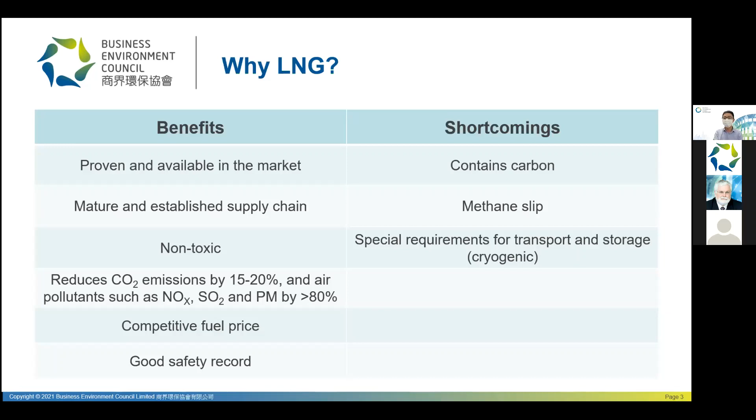While LNG can reduce air pollutant emissions, it is still a fossil fuel, and its reduction potential is dependent on the amount of methane released in the process, which I'll get into in a moment. Another drawback for LNG is its requirement for transport and storage, as the fuel is typically stored at minus 160 degrees Celsius.

So as I mentioned in my last slide, LNG is still a fossil fuel, and its main component is methane, which is a potent greenhouse gas, 86 times stronger than carbon dioxide over a short period of time, and also 34 times stronger over a 100-year time horizon. While this may be less of a problem if methane is completely combusted in the engine, methane may still be released unintendedly along the value chain, and also from incomplete combustion.

The amount of methane slip is largely dependent on the type of engine. Two-stroke engines release less methane than four-stroke engines, and existing engine technologies are already able to reduce well-to-wake emissions, which is the life cycle emissions from fuel production, refining, transportation, and combustion, by 4% to up to 21%, compared with conventional marine fuels.

And ship equipment manufacturers like Wärtsilä have cut methane slip from their dual fuel engines by 85% since 1993. And MAN Energy Solutions are also improving their engine designs, which can reduce methane slip by up to 50% and a potential of a 90% reduction.

For the industry, there are also more than 20 oil and gas companies signed on to the methane guiding principles, which is a voluntary partnership with 5 principles that aims at reducing methane emissions along the natural gas value chain.

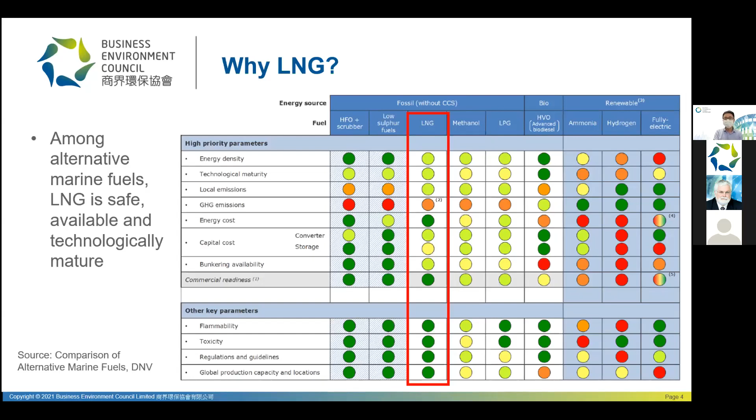This makes it clear that while we acknowledge LNG is not a carbon-free fuel, it still has a major role to play as a transition option until other zero carbon solutions become market ready.

So in the context of Hong Kong, for LNG ships to be refueled, Hong Kong first has to be able to provide LNG as a bunker fuel. Looking at the current natural gas value chain in Hong Kong, we import gas from different locations in the mainland for power generation through submarine pipelines. And we're also constructing an offshore LNG terminal in the south of Lantau that is scheduled for completion in 2022.

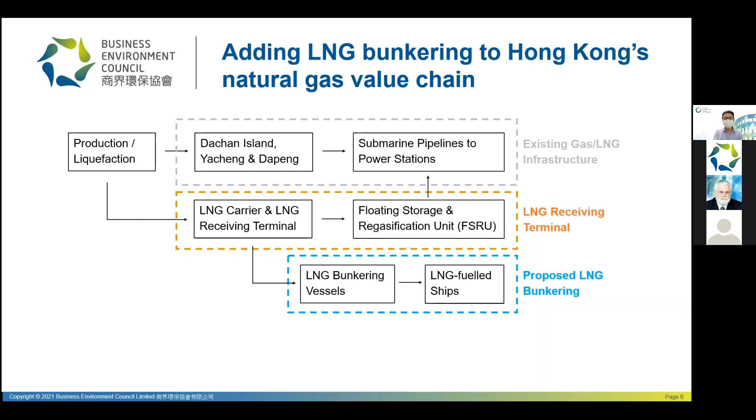The terminal will allow us to directly access the worldwide market for carriers to deliver LNG to a floating storage and regasification unit, FSRU, that will then deliver natural gas in its gaseous form for power generation. But to complete the last mile of LNG bunkering, LNG has to be supplied to LNG-fueled ships, for example, through bunkering vessels. This process is also known as ship-to-ship bunkering.

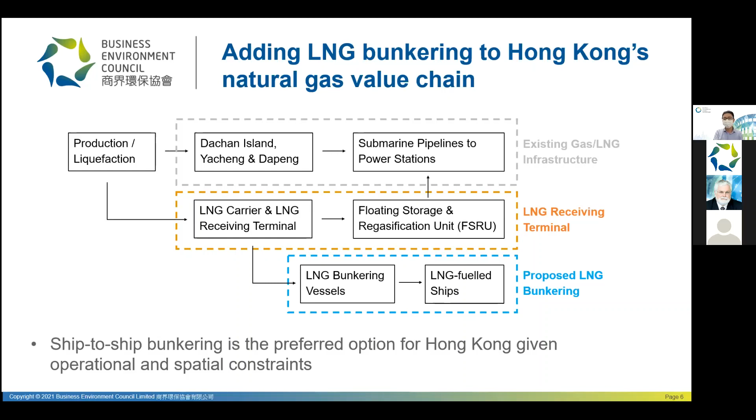While there are also other bunkering options, such as shore-to-ship or truck-to-ship bunkering, they will either require permanent onshore structures or take up land space in port operations, which will not be ideal for Hong Kong. And as with other commercial shipping fuels, LNG operations do present health and safety hazards. Therefore, the operational procedures that have been working well for the past decades must continue to be maintained in order to uphold the safety and efficiency of LNG bunkering operations.

So these regulations and guidelines include licensing, procedure and safety guidelines, personnel competency, environmental sustainability, and also simultaneous operations. I won't go into too much technical detail here, as there are already internationally developed and recognized standards to serve that purpose.

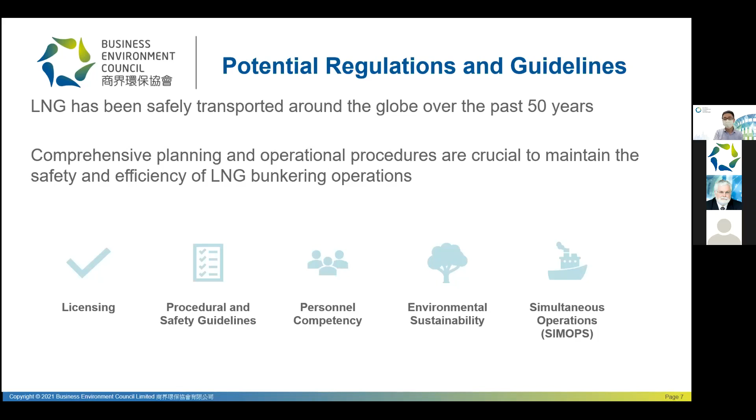For licensing, under the Gas Safety Ordinance, companies who manufacture, supply, or import LNG must submit their application to become a registered gas supply company to the Electrical and Mechanical Services Department, EMSD. These registered gas supply companies have a self-regulating duty to ensure the health and safety of workers and the public from gas risks. This is required on top of general vessel operating licenses issued by the Marine Department.

As LNG bunkering is new to Hong Kong, overseas references such as the comprehensive licensing procedure in the Port of Rotterdam, which I'm sure Kees will cover in his presentation, examine everything from ship safety, operational safety, nautical safety, and risk assessment of the operation before the licenses are actually issued.

And in terms of safety procedures, LNG's extremely good safety track record highlights the importance of robust design standards, good operational and safety procedures, and the maintenance of safety equipment. These are also well described and proven by existing international standards and guidelines. For example, IMO's IGF and IGC codes provide mandatory criteria for the design, usage, equipment, and system arrangements for vessels operating with LNG.

Other examples include the Society for Gas as a Marine Fuel, SGMF's guidelines for bunkering, and also the China Classification Society's guideline for LNG fuel bunkering operations. So these also provide comprehensive guidance for LNG bunkering operations.

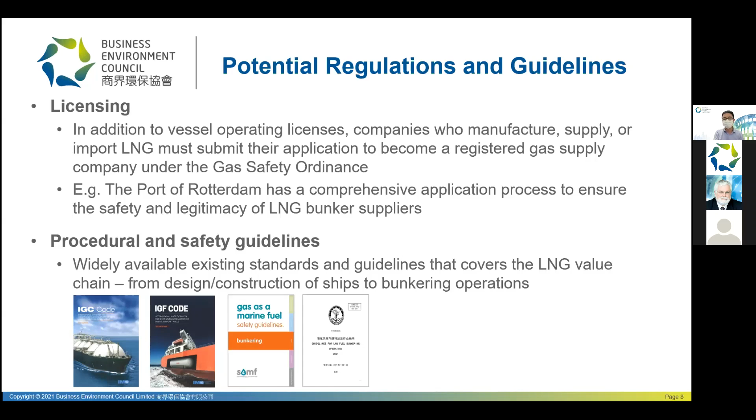In terms of personnel competency, basic training should be required for the crew on how to handle LNG. The International Convention on Standards of Training, Certification, and Watchkeeping for Seafarers, the STCW Convention, sets out the minimum requirements for the crew, and it's also widely adopted and referenced when governments develop their policies and regulations.

The STCW Convention provides guidance on special training requirements, such as health hazards and precautions, fire and pollution prevention, as well as the handling of cryogenic cargoes, such as LNG.

Another area is environmental sustainability, which is often overlooked in the context of LNG bunkering. As I mentioned before, LNG is made up of mostly methane. So it is crucial for ports and operators to put in place rigorous measures that prevent methane release during the bunkering process. For example, the European Maritime Safety Agency, EMSA, has devoted a section in their guidance on methane release mitigation, calling for operators to mitigate relevant risks through, for example, boil-off gas management, maintenance, planning, and compatibility assessments.

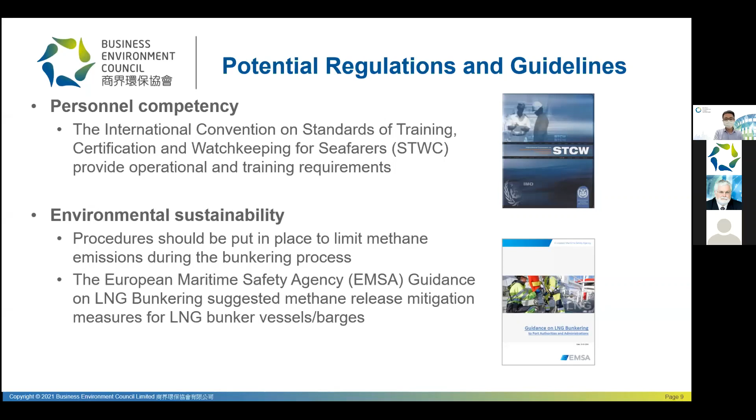And then for simultaneous operations, SimOps, it refers to two or more operations occurring at the same time at the same location that may interact or interfere with each other. In the context of LNG bunkering, a typical example is the loading and unloading of cargoes while an LNG-fuelled vessel is being bunkered. As these additional activities can lead to different parties being exposed to different risks, SimOps need to be carefully planned and executed.

There are a number of international guidelines regarding SimOps. Using SGMF again as an example, they published a set of detailed risk assessment and management guidelines in stages for operations during bunkering, as well as for port planning and ship design. So all of these are examples that guidelines and standards cover different aspects of LNG bunkering, and they can easily be considered in developing relevant standards for Hong Kong.

So a quick recap of my presentation. LNG is a proven and available transition fuel to decarbonize the shipping sector, while we wait for other zero carbon alternatives to become mature. Methane slip undermines LNG's greenhouse gas reduction potential, but is currently being addressed by the industry as well as engine manufacturers. Ship-to-ship bunkering should be the preferred option for Hong Kong if we were to adopt LNG bunkering. And most importantly, there's an abundance of internationally recognized and proven standards and guidelines. So there's no need for Hong Kong to reinvent the wheel on this.

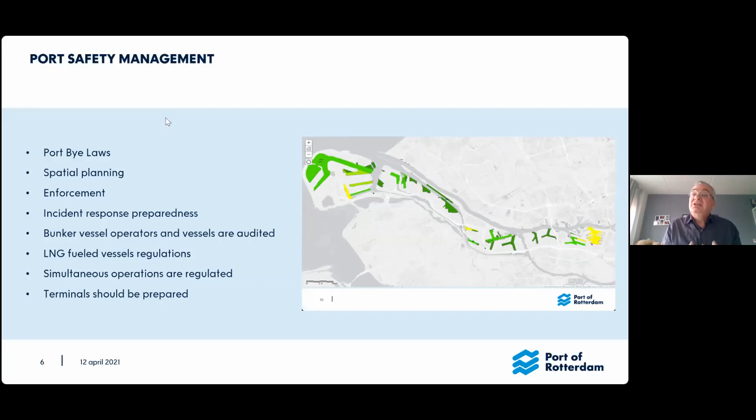And we decided to focus our regulations on the bunker operator, because we now have 9 bunker operators operational in our port. It is easier to control the safety of 9 bunker operators than 50 or 70 different LNG fueled vessels. So we focused our regulations on the bunker operator and the bunker vessel, of course. But first we did a spatial planning.

We look into scenarios, bunker scenarios, and then we have mandatory tools we have to use based on national legislation to make sure that the activities with dangerous goods are at enough distance to populated areas. So we first look into the bunker scenarios. We use this tool, this mandatory tool.

We calculated the safety contours. That's something that's obliged in the Netherlands. We calculated the safety contour, and we make sure that we plan all the bunker operations in an area that the safety contour never will reach populated areas. So that's an external safety item we have to do in the Netherlands. And well, if you do that, you will have a bunker map.

You can see an example of this bunker map, the green areas and the yellow areas. Well, in the green areas you can do bunkering, and in the yellow areas you've got some extra restrictions, for instance, on the bunker rate. And we give a license to the bunker operators. We say, okay, you are only allowed to operate in the green or yellow areas of this bunker map.

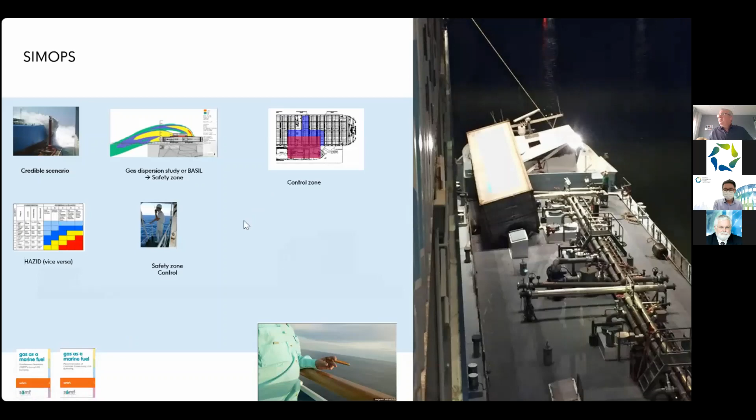Okay, going back a few views. What I told you, simultaneous operations, that's something that's in the port bylaws as well. You can only do simultaneous operations according to our port bylaws if you can tell the port authorities that you can do it in a safe way. And in a safe way means you have to do this HAZID. You have to make sure you know your control zones. These control zones are all mentioned in your bunker management plan. Also, the required risk mitigation is mentioned in your bunker management plan.

And later on, of course, the bunker operator has to combine the bunker management plan together with the bunker management plan of the bunker vessel into a joint plan of operation. And the operational work, the real bunkering, has to be performed conform the joint plan of operation. And that's for the terminal, that's for the bunker vessel, and that is for the LNG propelled vessel.

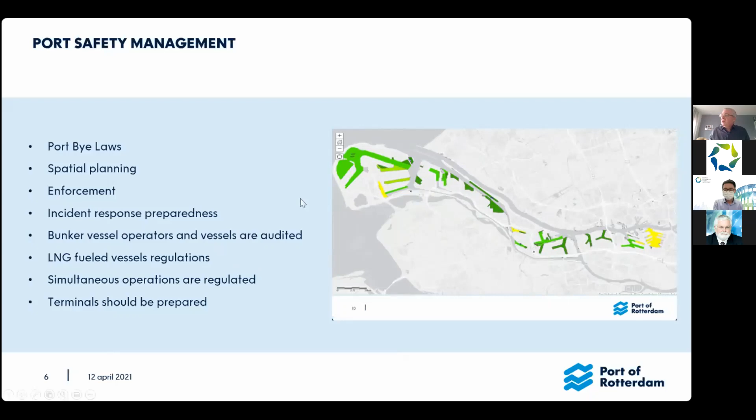It sounds quite easy, but it was a long journey to develop this safety framework, because the ports have to do all kinds of risk calculation, all kinds of risk assessment, nautical safety studies, and then you've got your bunker map. You have to regulate something for your enforcement, for your incident response, and at the end you get your licensing system that has to be in your port bylaws. The bunker operator, well, of course the vessel needs the proper certificates, but they also have to do the risk assessments and the HAZIDs and the HAZOPs.

And then you got your bunker management plan, then you know how to perform safe bunkering. And of course, the bunker vessel operator will be audited, as well as the vessel, in the way the IAPH prescribed. And then during the first bunkering, you also will have a reality check.

You can see that the vessel operator of the LNG fueled vessel has to do the risk assessments and the gas dispersion studies to make sure that they can have a proper bunker management plan, taking into account also the simultaneous operations. They also have to develop a mooring plan, of course, because they will have a gas carrier alongside that will have to be moored safely during the bunkering. There has to be a compatibility study performed between the bunker operator and the LNG fueled vessel.

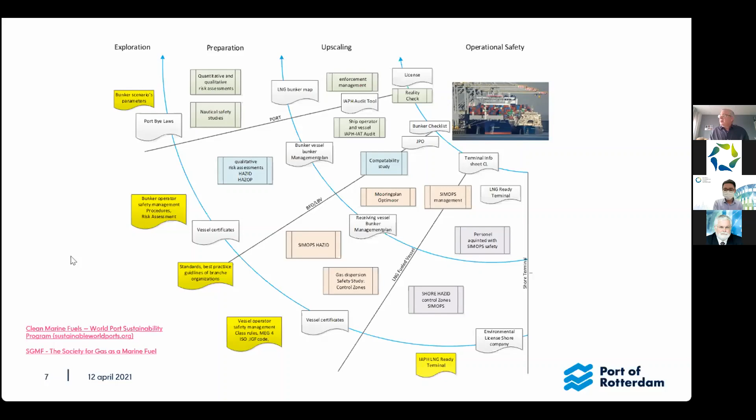Now, luckily we have a few tools we developed within the International Association of Ports and Harbors, especially in the Clean Marine Fuels Working Group. In the Clean Marine Fuels Working Group, we developed LNG bunker checklists, operational checklists. We developed them together with the industry. And during the bunkering, of course, the terminal has to fill in the list, the LNG fueled vessel has to fill in the list, and the bunker operator also has to fill in the list.

Then we have the audit tool. So the port operators can use the audit tool from the IAPH to check the quality of the bunker operators, and you can use that for the decision whether you will license the bunker operator. So that's also a very important tool for a port.

And then for the port authorities, we developed an LNG ready terminal document, where a terminal can read how they can prepare themselves for LNG bunker operations. And there is also a checklist for the port authorities to check the terminal to see if the preparedness is sufficient. Those tools are available on the Clean Marine Fuels website. You can even download them for free. So that is one of the tips I can give you. This is the link. Go to this website and look into those papers.

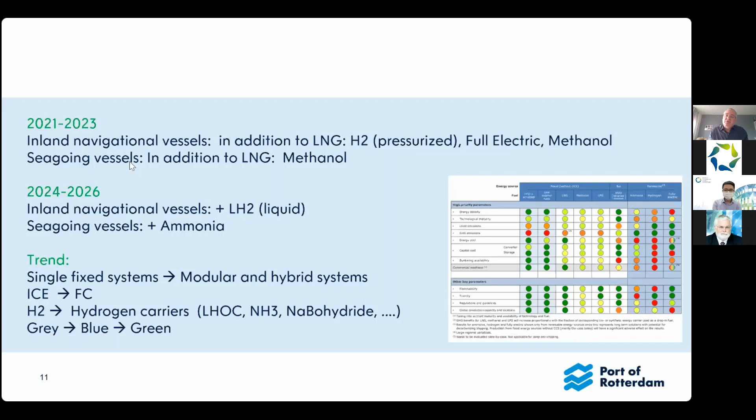And then, of course, most of the fuels will start as black, still fossil, or gray. Then you have carbon capture to make sure that there will be no CO2 emission, to blue and to green. And that's also for LNG. We will have a drop-in from bio-LNG and synthetic LNG later on. And for hydrogen, same, it's now still gray, made from natural gas, but later on it will be blue with carbon capture during the process, and then later green when you've got your electrolyzers in place. So this is really the end of my story.

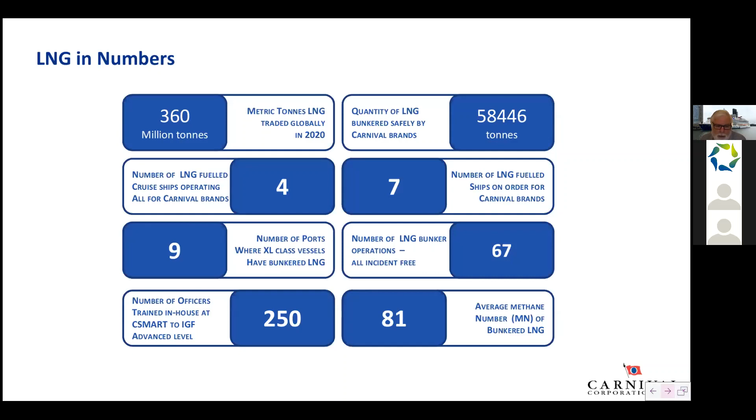It is the best in class fuel for local emissions. It solves all the issues we've ever had in port with regards to sulfur emissions, NOx emissions and particulate emissions, because the local air quality benefits from having ships operating on LNG.

It's increasingly available. You've seen from Kees how in Rotterdam the number of bunker vessels has grown, and we've seen more and more ports now getting bunker vessels online. Yes, it hasn't moved as fast as we'd have liked, and there are still some places in the world where we are challenged to find bunker operations. But touch wood, to date, we've managed to do bunkering wherever we've needed to. Very often that's meant we've had to be the first. That's not always the easiest thing, but I'll talk about that in a minute.

But yes, it's non-polluting. In other words, from spills, it doesn't cause any pollution. It evaporates. There are safety considerations to be taken into account, but Kees went into those. The one thing that you can find with LNG bunkering is it's a standardized operation. You don't have any of the challenges that you have elsewhere with different types of connections, different types of techniques; it's become very standardized.

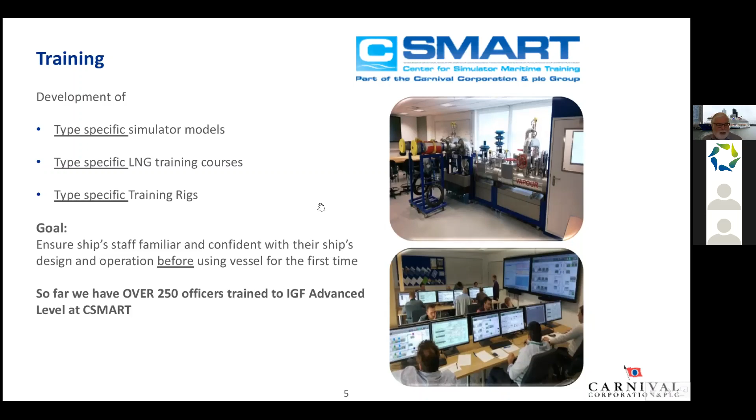I'm going up to the end of my presentation because we are absolutely committed to LNG. We think it's the best fuel that you can have. It helps us on our decarbonisation journey. And you'll hear a lot of people raising concerns around LNG. It's not the right fuel. It's a dead end. It's not the final solution. No, it's not, but it does help us enormously to get to where we need to be.

As Wayne mentioned at the beginning, there's a lot of discussion at the regulatory level about the decarbonisation journey moving forwards. We managed to peak our carbon emissions in 2011. We believe that by working together with others in this sector and in the industry and outside of industry, frankly, in the financial sectors, in academia, you can only do this by working as a team. We've joined Getting to Zero along with a number of other ship operators, banks, financial institutions, OEM manufacturers, because we're all committed to getting as close to net zero by 2050 as we can.

Ideally, we'll be having our first zero emission cruise ships in the mid-30s. But if you ask me now what they're going to be fueled on, I can't tell you. What I do know is that if we begin to see more availability of net zero LNG, whether that's through biomethane or synthetic methane, then we can clearly and quickly get towards the goals that we need to.

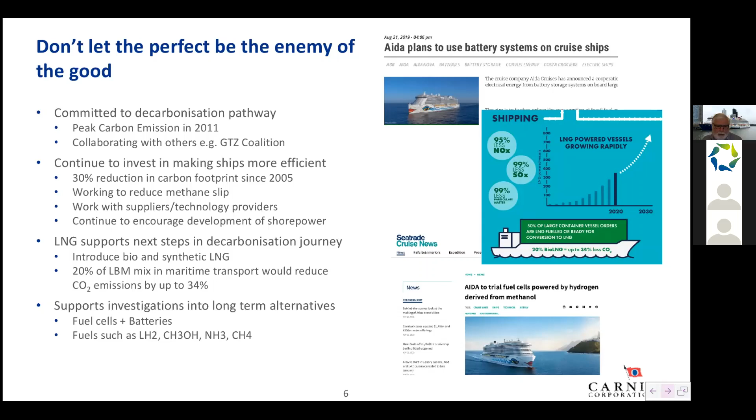So really the conclusions from my perspective: it's the cleanest fuel competitively available today. It is safe and it's fully compatible with liquefied biomethane and liquefied synthetic methane going forwards, both from an onboard perspective and in the supply infrastructure. And that makes it pretty unique in our view. And whilst it might not be the final solution, it is not the dead end that other people would have you believe. And it is a key facilitator towards the net zero future.